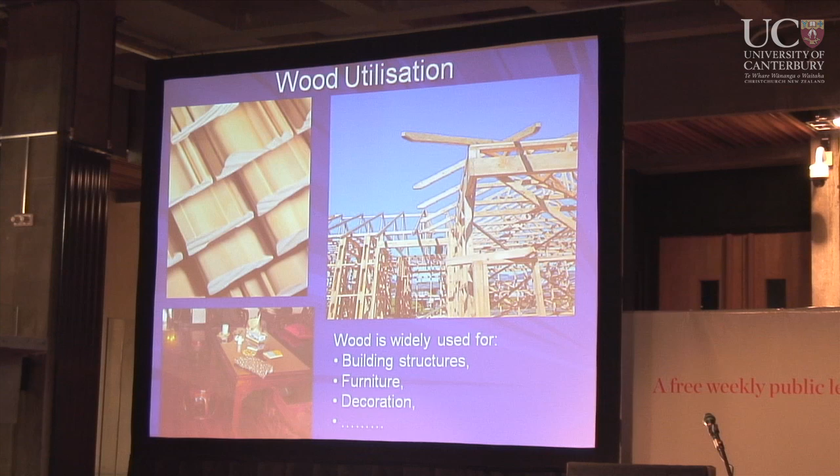So I have been doing research related to wood and also wood-based products for quite a number of years. And today I'm going to cover one of my projects on the wood recycled plastic composite as a building material. Wood has been used widely for structure, for decoration, for furniture, so it's a quite widely used material. So why is wood used so widely? We know a lot of advantages. It's available in many species, sizes, shapes, and has the properties to suit almost every demand.

And wood is easily shaped with tools and fastened with adhesive, nails, screws, bolts, etc. And dry wood also has good insulation properties against heat, sound, and electricity. And the growth ring pattern and colors make it very pleasant for furniture or decoration. And also, wood can be combined with other materials for both functional and decoration uses. And very importantly, wood is a renewable material. The trees absorb CO2 from the atmosphere while they are growing. That is a very good thing.

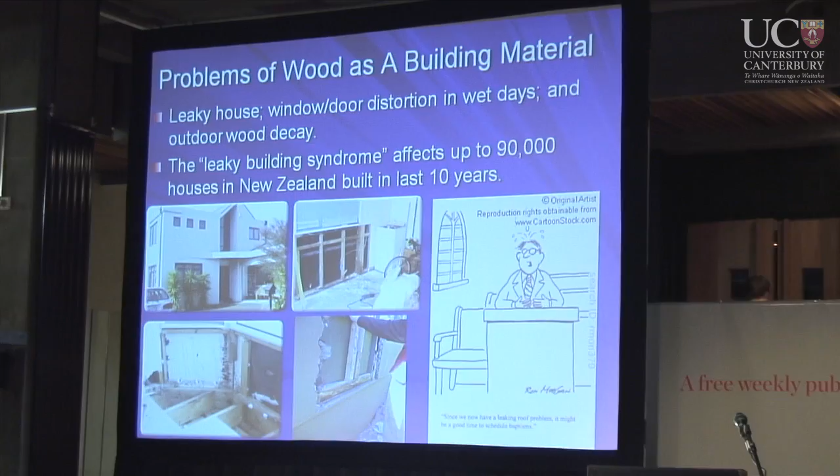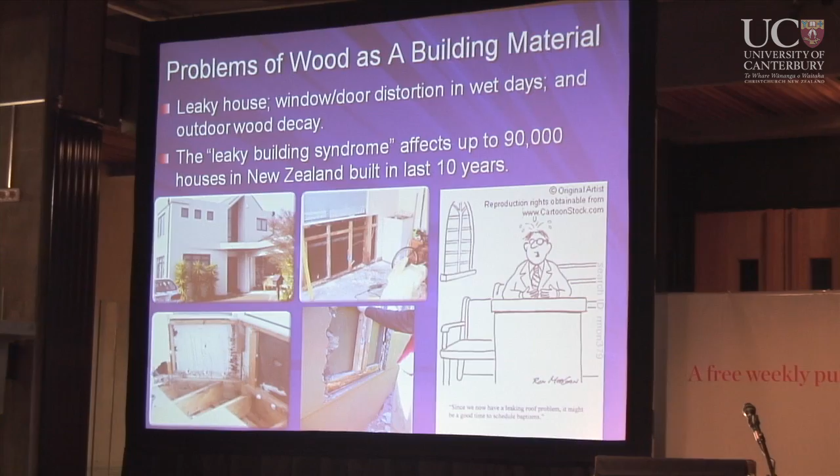However, there are some other not very good things about wood. We have heard of the leaky house. And we know when the day is wet, sometimes you get your window and door jammed and distorted, and also the outdoor wood structure gets decay. So that is a problem. Leaky house and leaky building syndrome affect up to 90,000 houses in New Zealand. If unfortunately you are one of them, you are not alone. In New Zealand, it's about 90,000 houses built in the last 10 years.

So why does this happen? Why does the house get the leaky problem and other problems? There are some natural properties of wood. We know wood swells when it's wet. When you have a wet environment, or you put the wood in water, it swells. When the wood is dry, it shrinks. So if the shrinking and swelling is not uniform, you get a distortion. You can see the wood here.

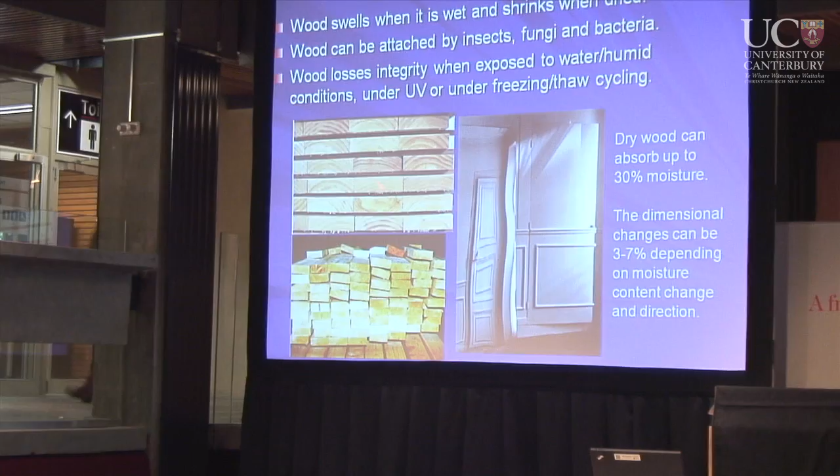You get a distortion. Initially it's very flat. After drying, you get a distortion. And if you have a door like this, you possibly get a lot of frustration. You cannot open it on a wet day, and that is not very good. And dry wood can absorb up to 30% of moisture.

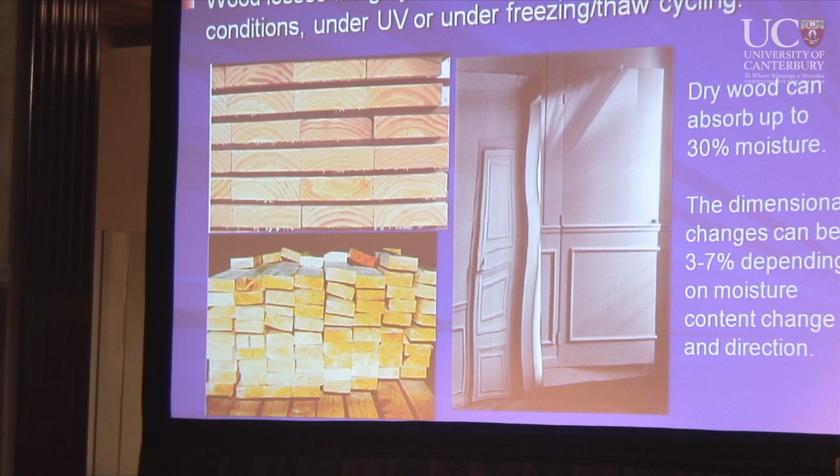Are you surprised? If you put the wood in a very humid environment, every kilogram of dry wood can absorb up to 300 grams of water. And at the same time, it swells, to 3 to 7% depending on the moisture content change and direction. So that causes a lot of problem.

And also the wood can be attacked by insects, by fungi, or by bacteria. The wood loses integrity when exposed to warm water or humid conditions, or UV, or freezing and thaw cycling. So those are the basic causes for the problem with wood.

Okay, solutions. So what's the solution? We need a good design and construction to prevent water penetration into the building. We need to modify the wood, normally using chemicals to make it more stable and durable. So if softwood is used for decking, playgrounds, or marine structures, you have to treat the wood with chemicals. A very common chemical is chromated copper arsenate.

Have you heard the story about this? It's still okay in New Zealand and Australia, but in the US and European countries this has been put under restriction. If you sell chemically treated wood to the US, you will be in a difficult situation. So that's one wood issue - good thing, bad thing.

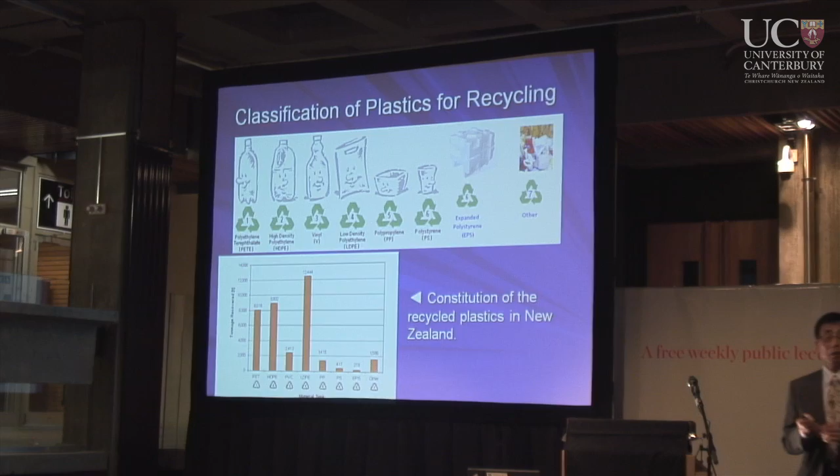And this is the recycled plastic composition. You can see a lot of the plastics we recycle are HDPE, low density polyethylene, high density polyethylene, and PET. So we have a lot of plastic recycled that we have not yet processed - that's a potential to use this plastic for a value-added product.

On this background, we have a research project where we developed a new product using recycled plastic and wood sawdust to make a value-added product for building materials. And if the material is stable and durable and doesn't need any chemical treatment, it's a win-win situation - we can use waste materials and produce a good product for building applications.

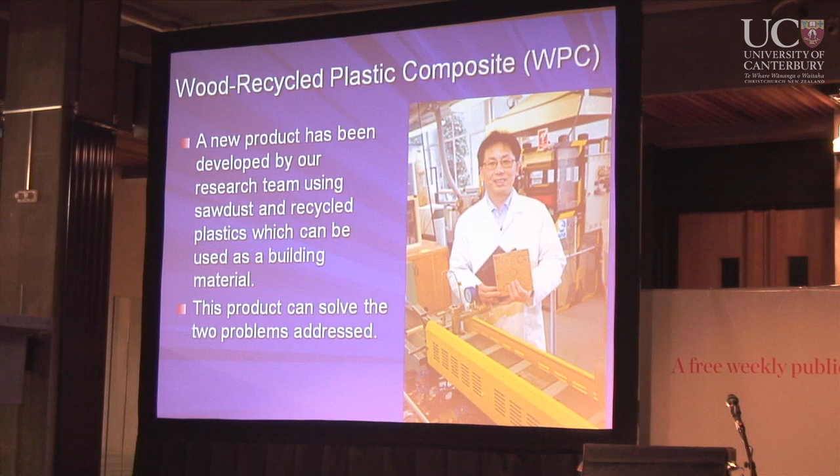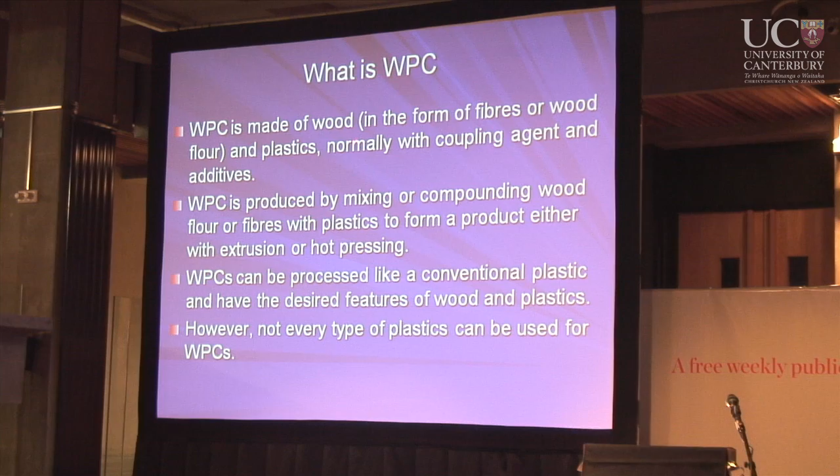Okay, so this product can solve two problems. What is a wood plastic composite? That is the product's name - it's a wood plastic composite, made of wood in the form of fibers or wood flour, and plastics, normally with a coupling agent. We have to add some coupling agent, a very small proportion, to hold the two materials together. Plastic is hydrophobic - it doesn't like water. And wood is hydrophilic - it likes water. They don't like each other, so we have to add something to force the plastic and wood to hold together, and then we can make a good product.

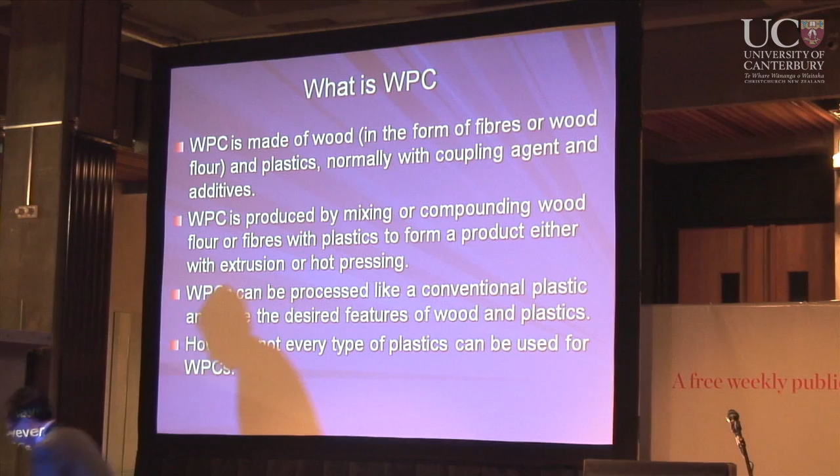The production line is, firstly, we have a mixing step to mix the wood and plastic uniformly together - also called compounding. Then we use a mold, either extrusion or hot press molding, to make a solid product. So these are some products, if you'd like to see, and I've got some samples.

So what I have here, I got some recycled plastic. You've got this food container, and then you've got some sawdust inside. And then we got some product — this is the product we made. So if we use these waste materials and put them together to make a product, you can feel how strong and stable the material is.

Okay, so the product is made of plastic and wood. However, not every type of plastic can be used for this product, so we have to select a certain type of plastic to make it. And we know there are two types of plastic.

One is called thermosetting plastics, also called thermosets. These plastics can cure to a strong form through heating. However, once this plastic is set, the material cannot be re-melted — you only use it once. These thermosetting plastics include phenolics, epoxy, polyester, and silicones. Because this type of product cannot be re-melted, it cannot be used for this composite product.

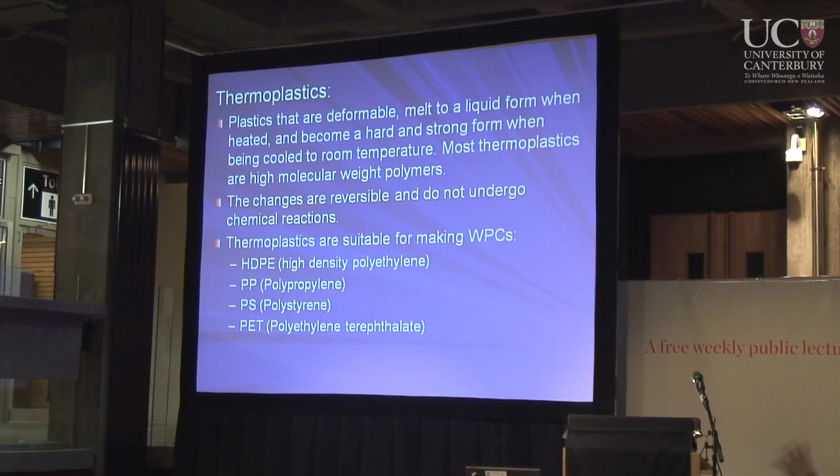Examples of thermoplastics are high-density polyethylene, polypropylene, polystyrene, and PET. This kind of product can be used for wood plastic composite. If you look at the label numbers, most plastic products are thermoplastic, so hopefully we can use some of this recycled plastic for making wood plastic composite.

However, if we want to use this composite for building materials, we need to know the required properties for building. We need the material to be stable — that means when you expose the material to changing humidity conditions, it stays stable and doesn't change too much.

And if you put the material in water, it should not absorb too much water, and it should not change too much in dimension — that is stable and durable. If you use the material for a long time, you don't want it to lose its integrity, strength, or stiffness — that is durability. Appropriate mechanical properties are also needed.

So stiffness, also called Young's modulus or modulus of elasticity, and strength, also called modulus of rupture. Let me give you more explanation about stiffness and strength — these are very typical engineering terms, and if you're not an engineer, you may not be familiar with them.

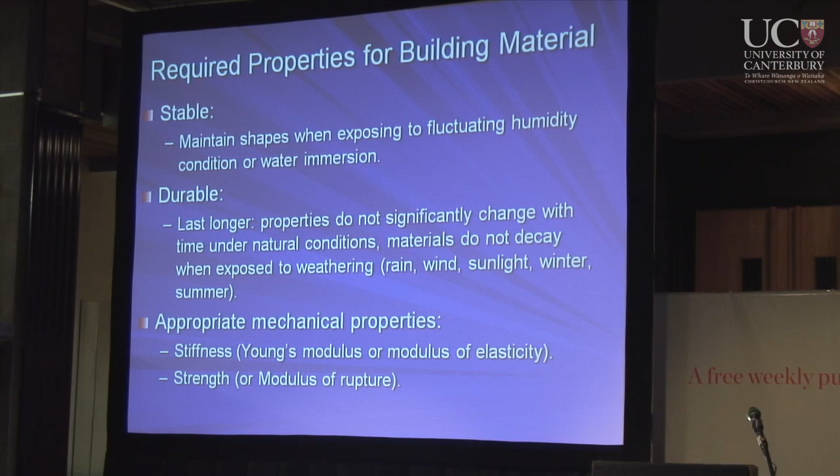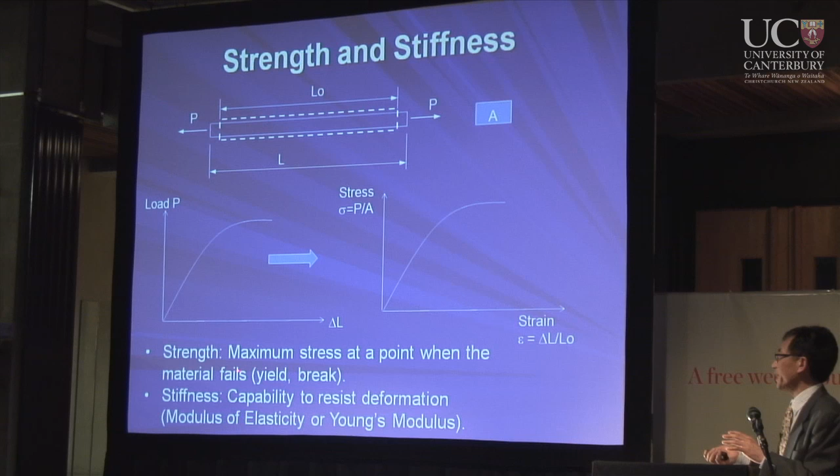And this is the product — let me give you some explanation about the stiffness and strength of materials. So a common explanation of strength is the material's maximum stress at the point when it fails, either by yield or by breakage.

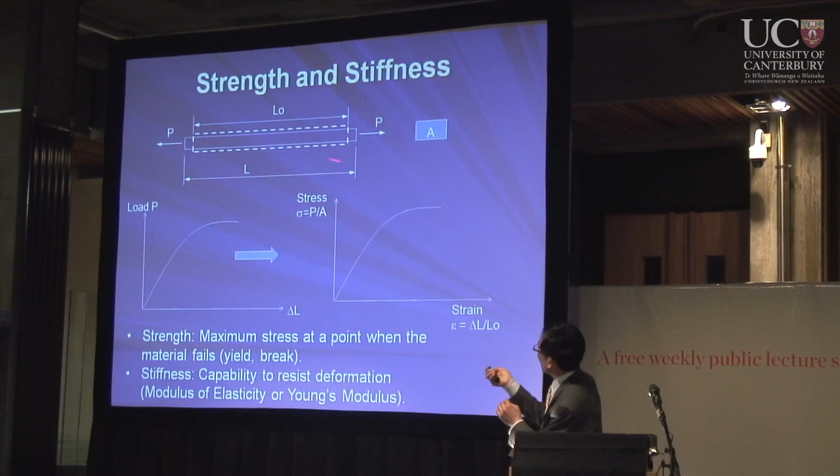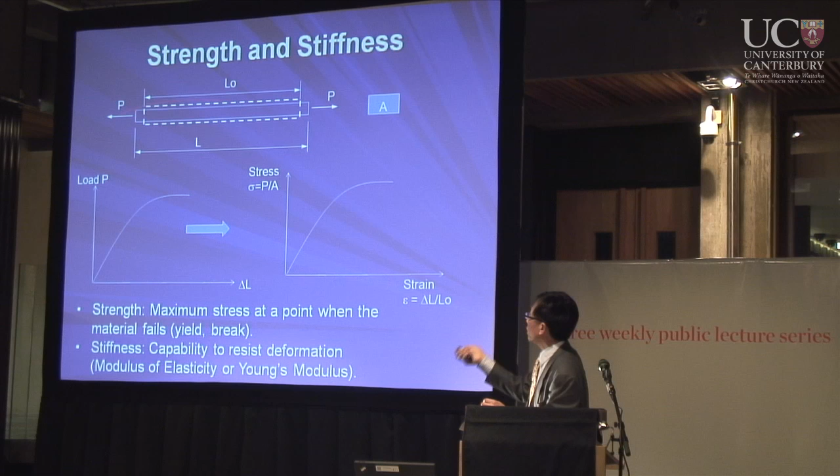So if this is the material under stress, the initial length is L0, and after stretching it becomes L, with the change in length being delta L. If you plot the load against the deformation — the length change — you get this curve. If the material is stiffer, the curve will be steeper, meaning under the same load the material changes less. The higher that slope, the higher the stiffness — the stiffness is the material's capacity to resist deformation.

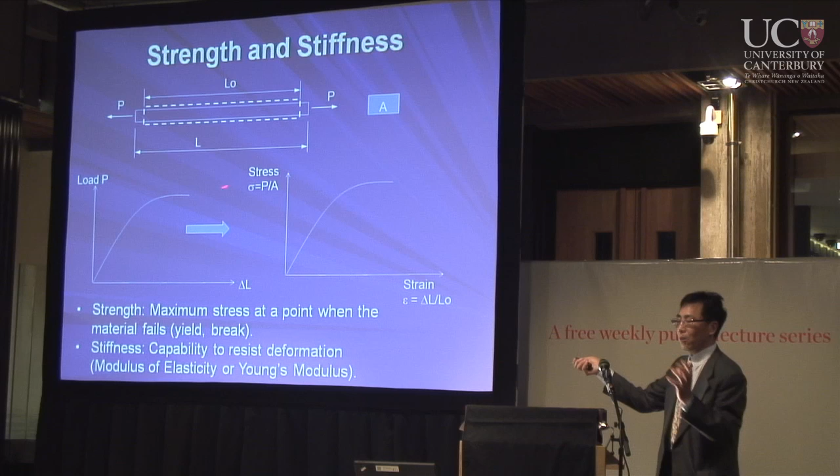If the material is stronger, the load at which it breaks is higher. If you convert the load-deformation curve into more specific terms, it's called stress — the load divided by the cross section — and strain, the length change divided by the original length. If you plot stress against strain, this curve isn't affected by the size or load of the material; it reflects the property of the material itself. If the material is very stiff, this slope is quite steep.

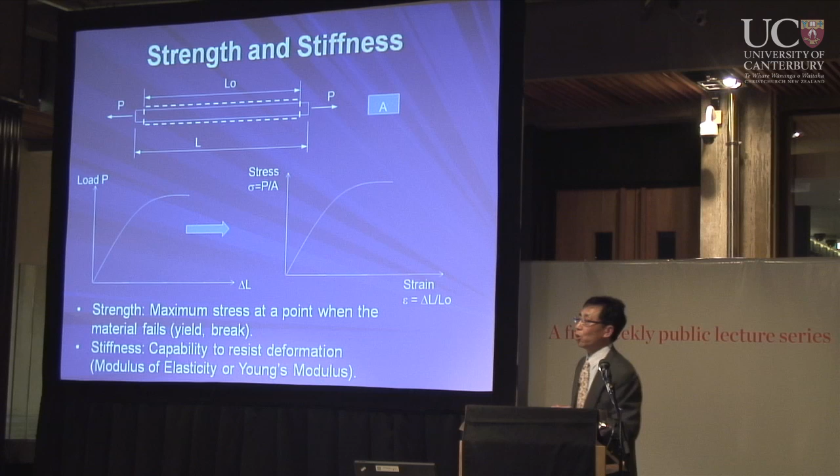This curve is very steep if the material is strong, and the stress is quite high. So when we build a house, we like the material to be stiff, stiffer and stronger. Is that right?

So that is the property we need for building a structure. Okay, so what are the key features for the wood plastic composite? The material is more stable compared to wood. If you put the material in water, it does not absorb much water, and does not change much in terms of dimension.

It's a lower processing temperature, so comparing to steel and concrete, we use a normal 180 to 200 degrees C to process these materials. So it's much lower energy needed for processing. And the lower weight to strength ratio means if you've got this high strength, you don't need too much material compared to steel and concrete.

And it's durable compared to wood: anti-insect attack, UV resistant, and anti-decay, which can be used to substitute chemically treated wood. So that is a good thing. And it can be recycled - the material, when you use it once, you can recycle and reuse again. And it can be easily decomposed, so you don't need to send it to the landfill. You can easily bury it in the soil and it can decompose.

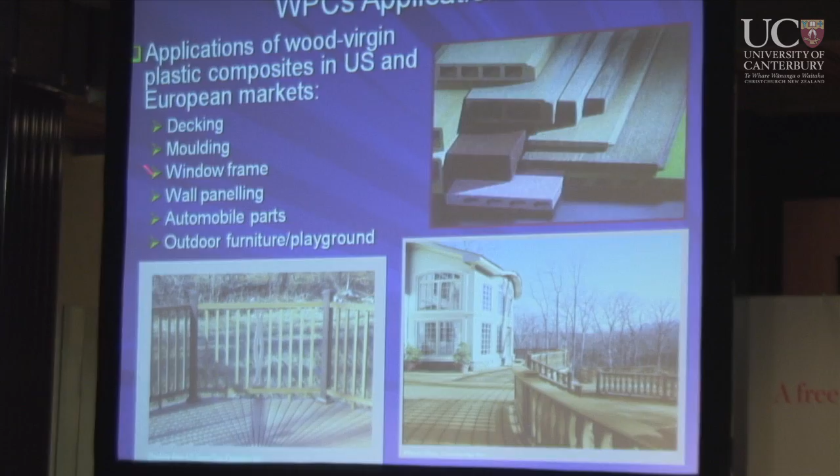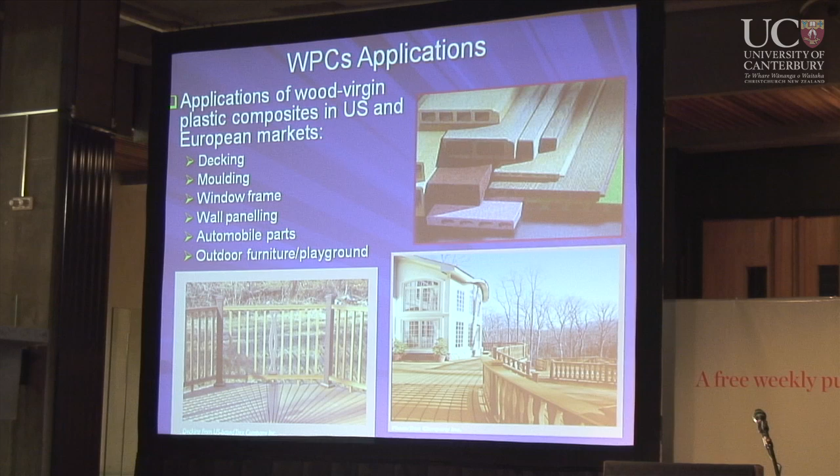So in the US and European countries, the wood virgin plastic composite has been used for decking, for molding in the house, for window frames, for wall paneling, for automobile parts, and also outdoor furniture and playgrounds. So that is already in application for virgin plastic.

Our project uses recycled plastic. So what's the benefit of using recycled plastic? The environmental benefit is obvious - you can reduce landfill and solid waste. And also the cost is lower. The recycled high-density polyethylene plastic is 31 to 34% cheaper than virgin plastic.

How about the properties? Surprisingly, the properties are quite similar between virgin plastic and recycled plastic, even a little bit better. So we still try to study and understand why the recycled plastic has a little bit better strength and a little bit better modulus of elasticity. So you can see it's slightly different, slightly better.

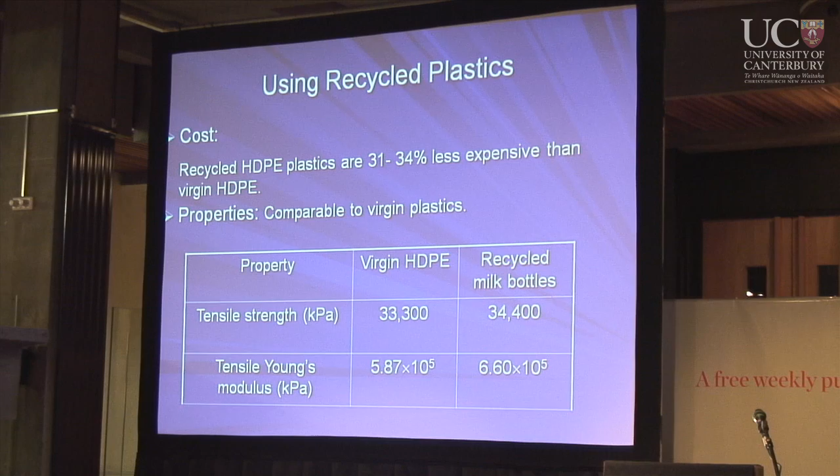The processing in our product normally can be done through either press molding or injection molding. The current wood plastic composite in the market is mainly made through injection molding, and we developed a technology using press molding.

What happens is we first mix the wood particles and the plastic together through a compounding machine. And then we put it in the hot press to form a sheet. As you've already seen, after the hot press the product has been made. Of course, you can make a more complicated shape of product using the hot press.

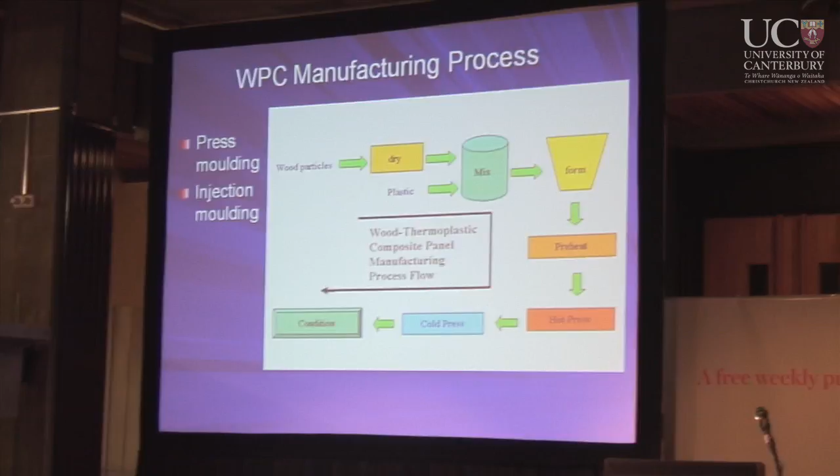What's the benefit of using hot press? The surface property is much better. If you look at the injection molding - two samples from a company that uses injection molding - you can feel the surface, and you can see the surface is quite different. This surface is not as good as the hot press product.

So if you look at the flat sheet, hot pressed product, it's very smooth and also very durable, the surface with hot pressing manufacturing.

Okay, so what's new in our work? As I mentioned, we use recycled plastic. We use hot press molding process. We use optimized processing conditions to make the product which has the most desirable properties.

We test the materials for stability, durability, strength, stiffness, and accelerated weathering conditions. Of course, we cannot leave the materials in natural conditions because otherwise it would take many years - even after my retirement we'd still be testing the material durability. So we have to use a way to accelerate the weathering conditions to test the materials. I will tell you how we did that later on.

We compare the materials we made with materials using virgin plastic. As I mentioned, in the market, virgin plastic composites are already available. So let's see what's the difference if we use recycled plastic to make a similar product.

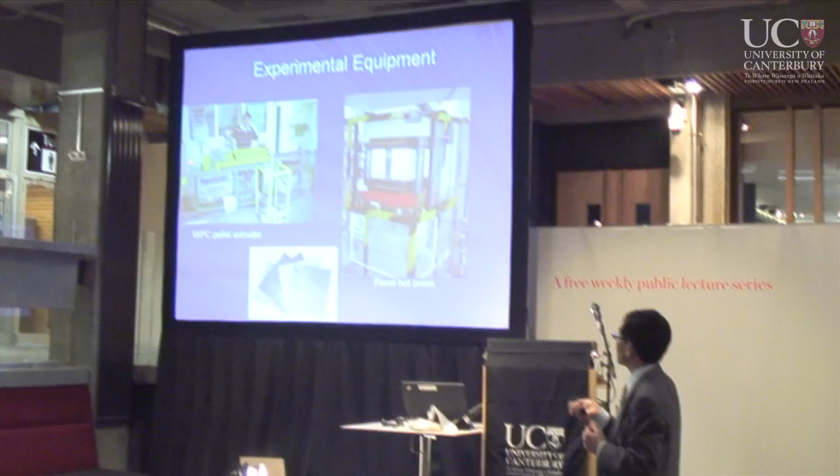This is the equipment we have in the Department of Chemical Engineering. This is the extruder we bought, thanks to the college giving me capital a couple of years ago to buy this machine. This is the hot press, which was in the Simon building before the earthquake, and now that building has been demolished. However, we have another good press in the mechanical engineering department to make the product, and these are the products we made.

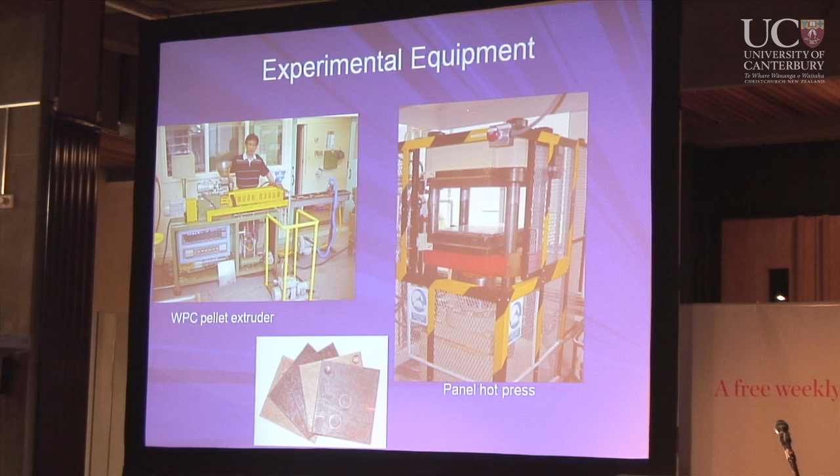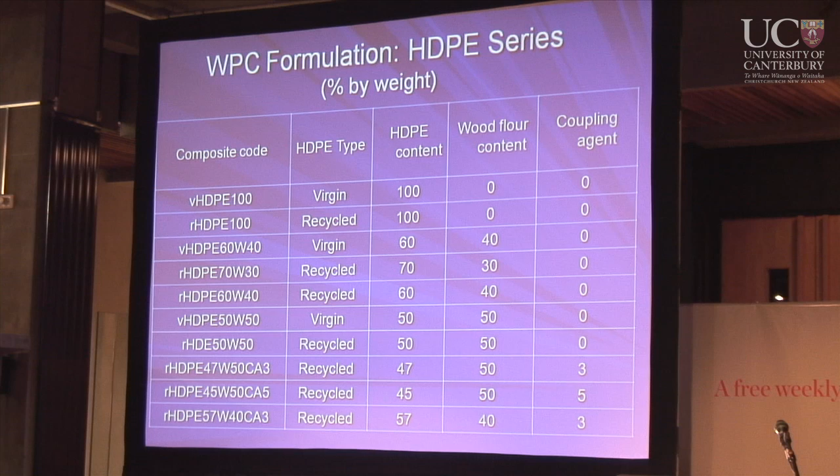So we use different formulations - you can see V here is virgin plastic, R is recycled, with different proportions of wood and plastic, so we can see what the result is. We also did the same for PP, polypropylene.

Okay, so we do the tests. As I mentioned, we need to look at stability. We put the materials in water for 2 hours and 24 hours to see how much water is absorbed and what dimensional changes occur. Then we do tests for mechanical properties - tensile tests and bending tests to get the stiffness and strength of the materials.

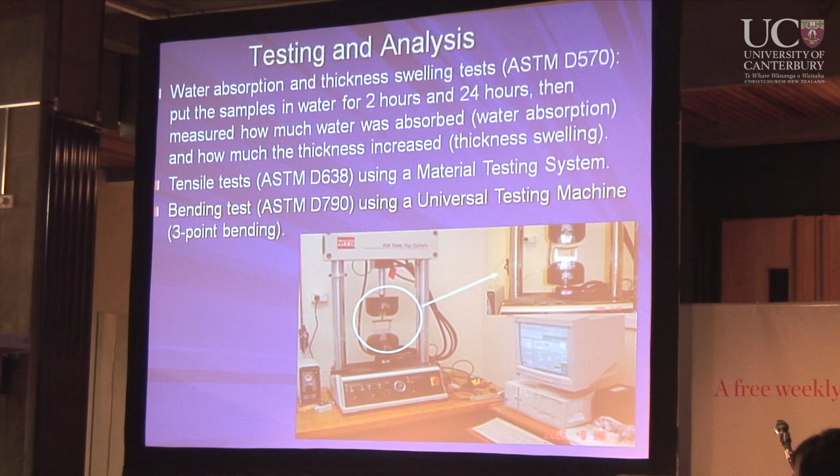We also did accelerated weathering tests using freezing and thaw cycles. We put the materials in the freezer for 12 full cycles. Every cycle, we put them in water for a week, then in the freezer for 24 hours at minus 27 degrees C, then thaw the materials for another 24 hours, and measure the properties after 12 cycles - quite a long cycle time.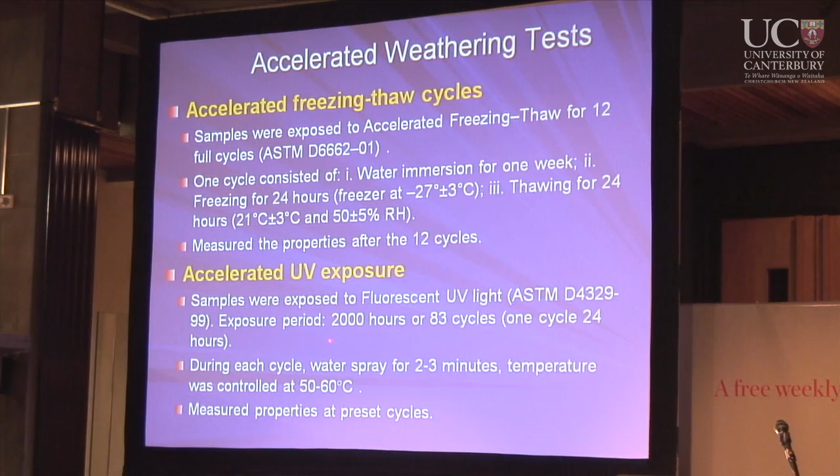We also did accelerated UV exposure tests. We put the materials in a UV box with UV light exposure for 2,000 hours. During these cycles, we spray water and control the temperature at 50 to 60 degrees C. Then we measure the properties at preset cycles to look at the mechanical property changes and stability for both accelerated weathering tests.

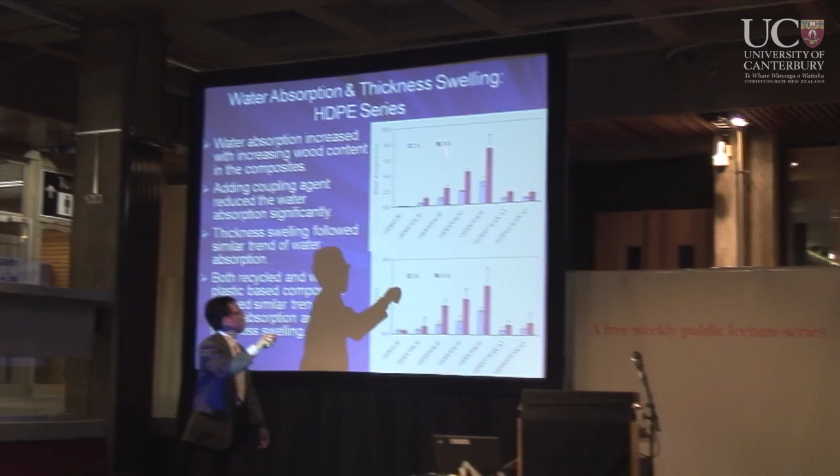And these are the results. This is putting the sample in water - you can see the results here for 2 hours and 24 hours. This is 100% plastic - no surprise, almost nothing, no water is absorbed.

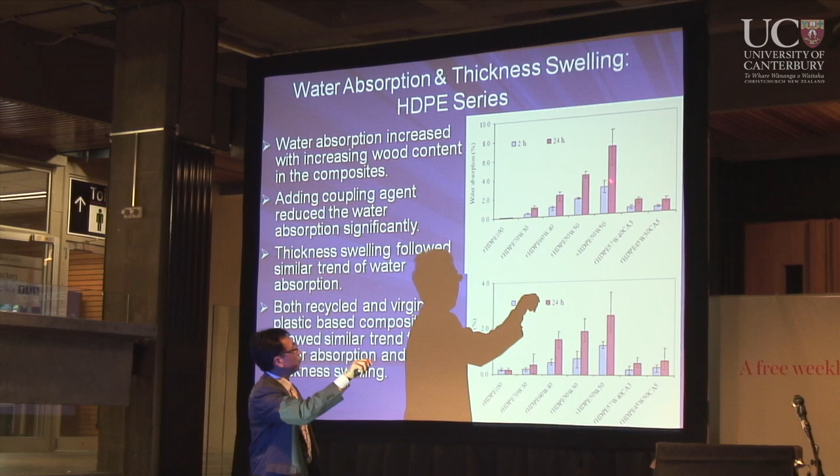This is 70% plastic and 30% wood, and this absorbs some water. This is recycled plastic, 60% plastic and 40% wood. This is 50-50, shown at 2 hours and 24 hours - got a lot of water absorbed by the material after 24 hours.

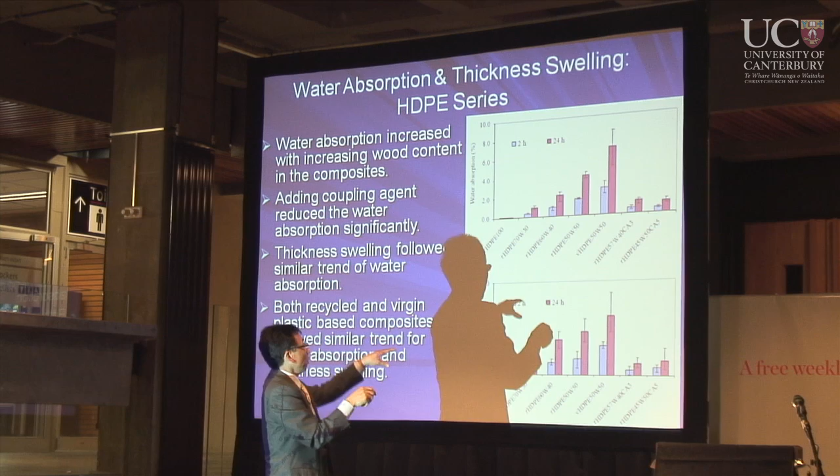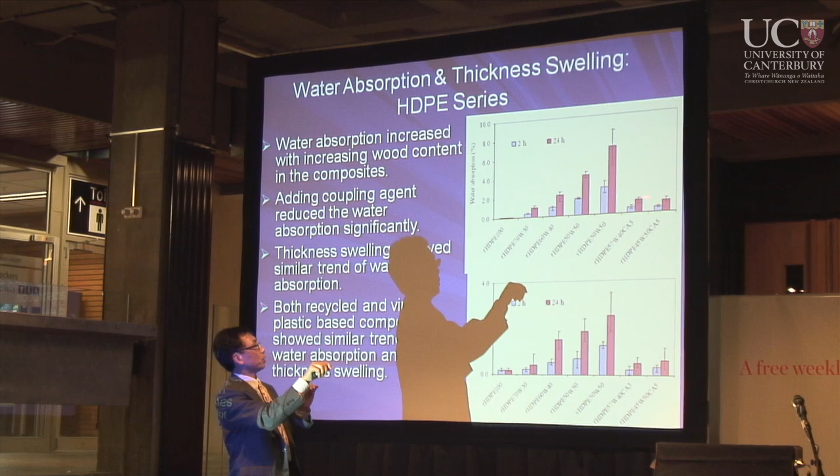However, this is much lower than wood alone. If you put a piece of wood in water for 24 hours, it can absorb quite a lot of water, at least 30% - that's a lot. But when we add a little bit of coupling agent, the water absorption is reduced quite significantly. That's no surprise - when you hold the materials together firmly, it stops water penetration.

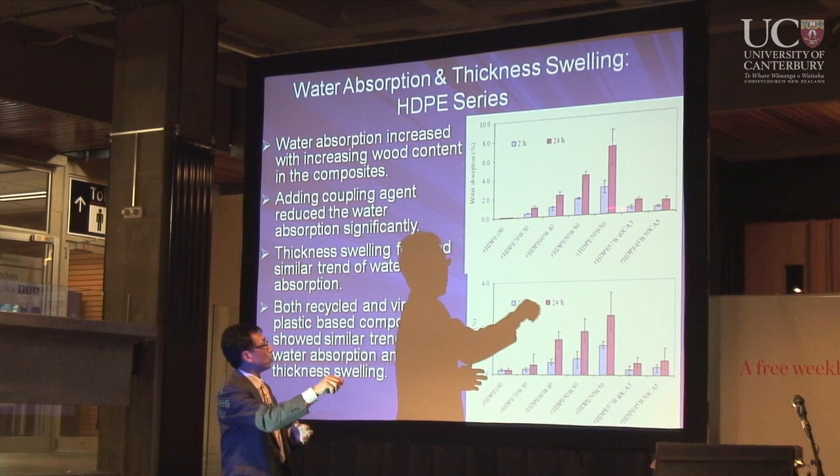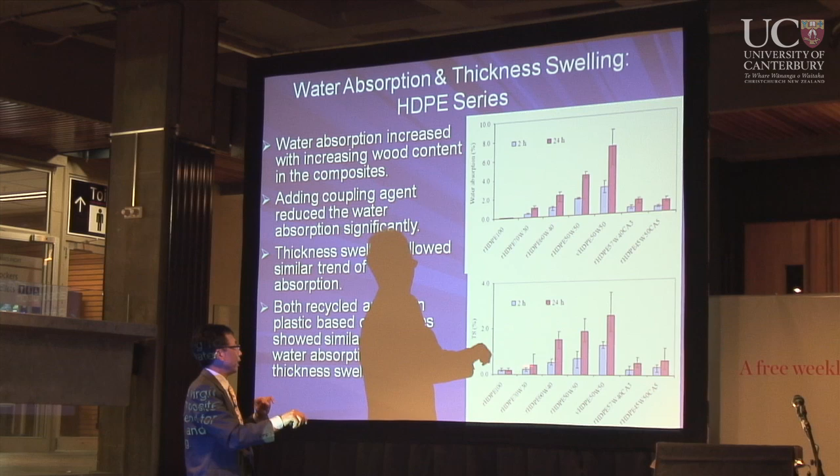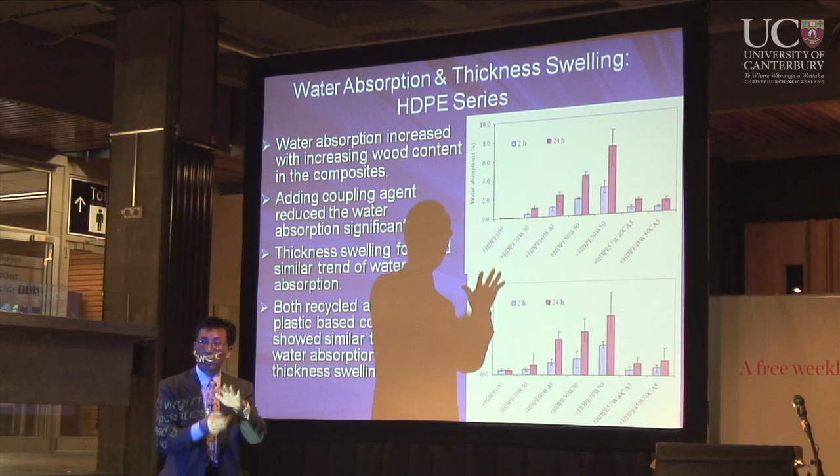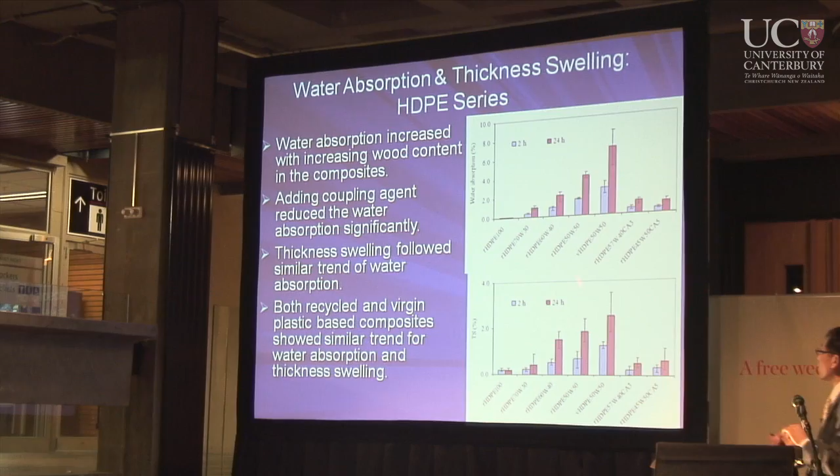So you can see this is a very small water absorption. Correspondingly, if you have less water absorbed, the thickness swell is quite small—you can see almost 0.5%. As I mentioned, if you put real wood in water for 24 hours, you get at least a 3 to 5% increase in the thickness direction. So this is much smaller swelling, much more stable. From this result, we can see the material is quite stable—it absorbs much less water, and the thickness swelling, the dimensional changes, is much smaller than wood.

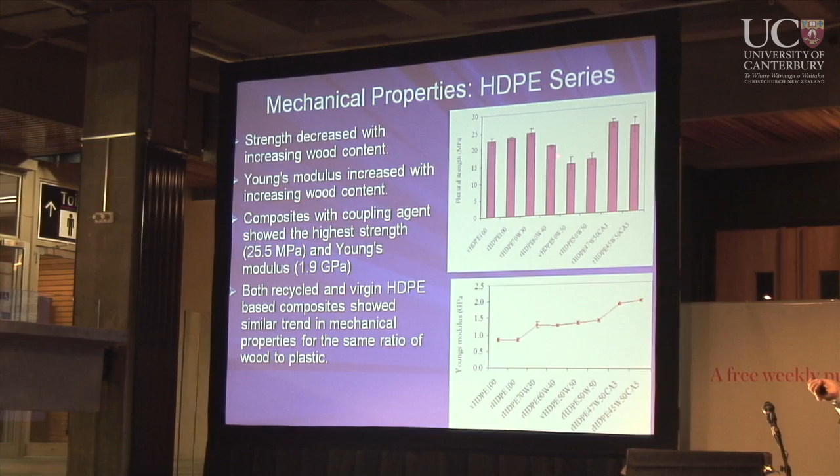And then we look at the mechanical properties. This is the strength. If you got a pure plastic, it's a little bit higher. However, when you add wood, the strength is decreased a little bit. But if you add a little bit of coupling agent, the strength is increased quite significantly.

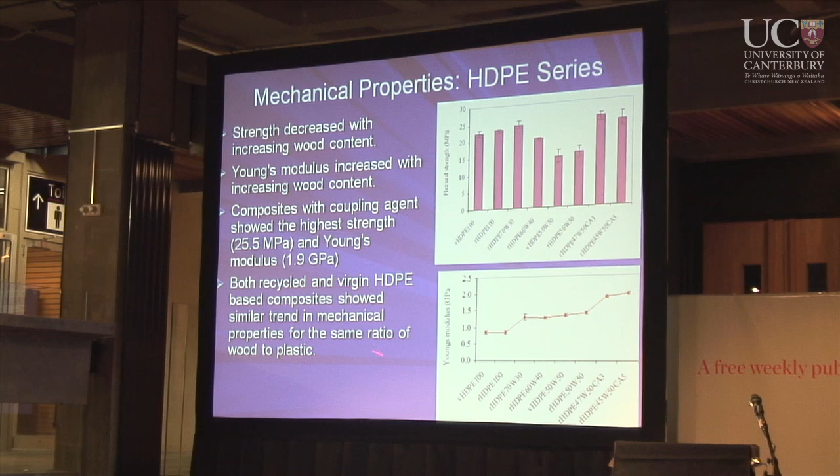That's the megapascal of this strength, almost 25. And this is the stiffness. As I mentioned, we like the material to be stiffer. The stiffness for pure plastic is much lower—no surprise, if you try to bend pure plastic it's relatively easier. If you add wood, the material is getting stiffer and stiffer. If you add a little bit of coupling agent, it's very stiff—the stiffness is very high for these materials.

So if you look at the result, these are the formulations we want to develop—that gives you the best result for stability.

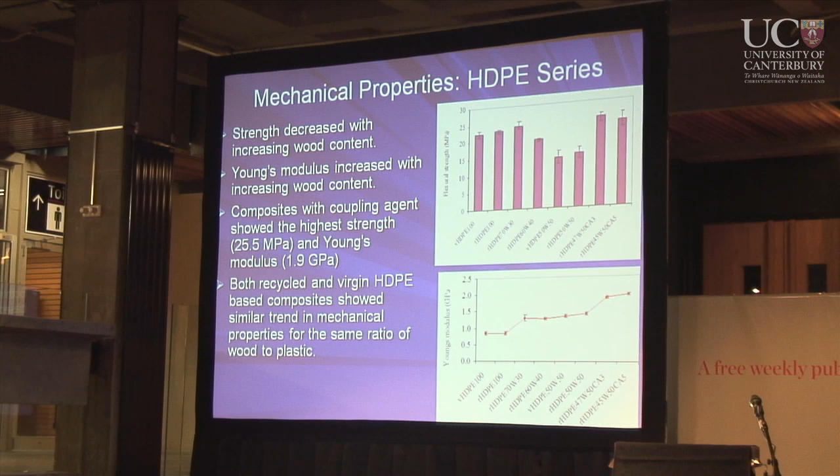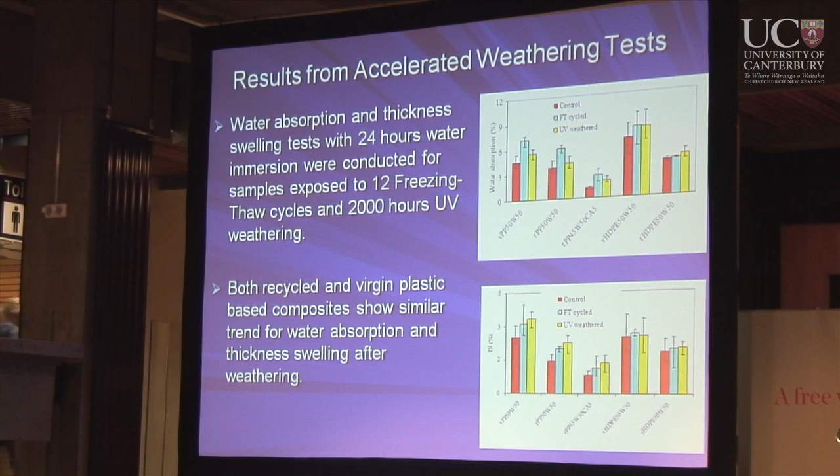So that is the result. And then we see, what's this? And you can see what's the market.

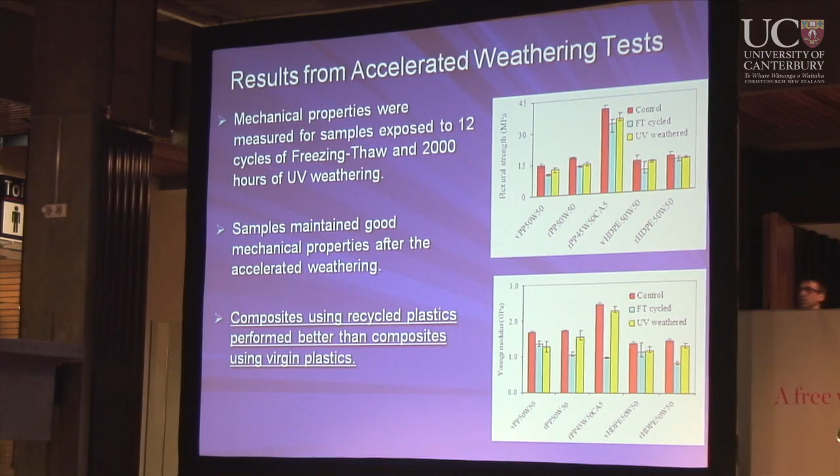Okay, the product is good, but I didn't tell you something not really good—it's the color. If you use recycled plastic, the color is not as clear or as white as this one, so you get a dark color. However, a painting company recently contacted me. They want me to do a project to see about painting and the properties—if we have a very dark color, whether we can put some paint on the surface and still get a good color. We are still going on, continuing research on this product to make it paintable.

Okay, so that is the result coming from our research. If you want to build a plant, you may be concerned about the dollars—how much we can sell if we make this product for decking, for example. At the moment, New Zealand consumes about 30,000 cubic meters of wood for decking. Are you surprised? However, two-thirds of that material is imported. Unfortunately, we sell a lot of wood, but also we buy a lot of wood, hardwood, for decking.

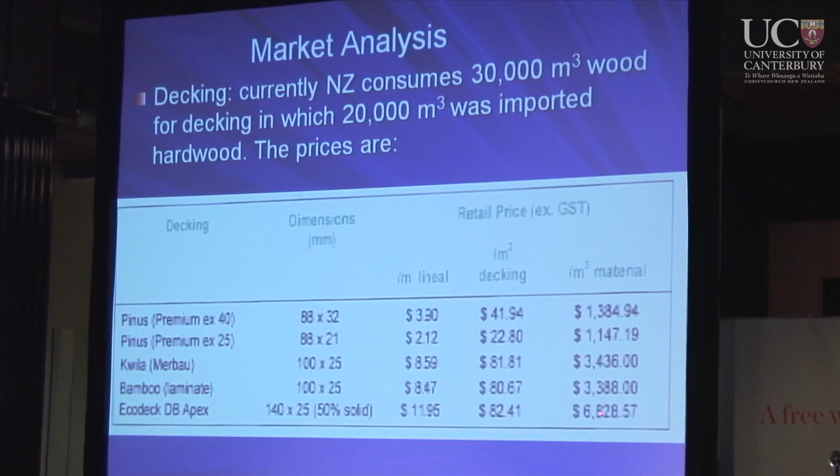And the price: if we use pine, the price per cubic meter is about 1,300. If we use imported wood, 3,500. If we use the Ecodeck, which is similar to the current market price for wood virgin plastic composite for decking, it's $6,800 a cubic meter. So that's quite a lot. And if we try to occupy only 10% of the market, that is 2,000 cubic meters.

If you want to build a plant to produce 2,000 cubic meters a year, using the median price, how much money can you still make? 7 million, is that right? Almost 7 million.

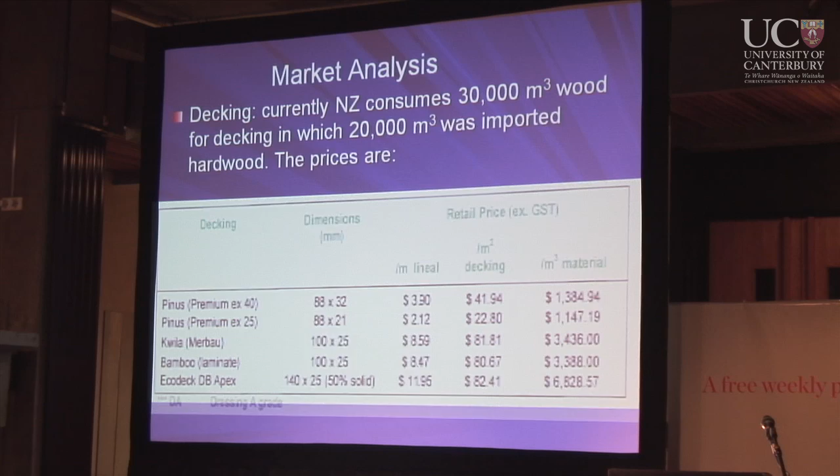And then you get another price if you use the materials for molding. The price for molding is a little bit higher. If you use pine, finger-jointed, primed and painted, that is 5,000 per cubic meter. If you use clear pine, it's 6,000 per cubic meter. If you use MDF, it's 3,000 a cubic meter.

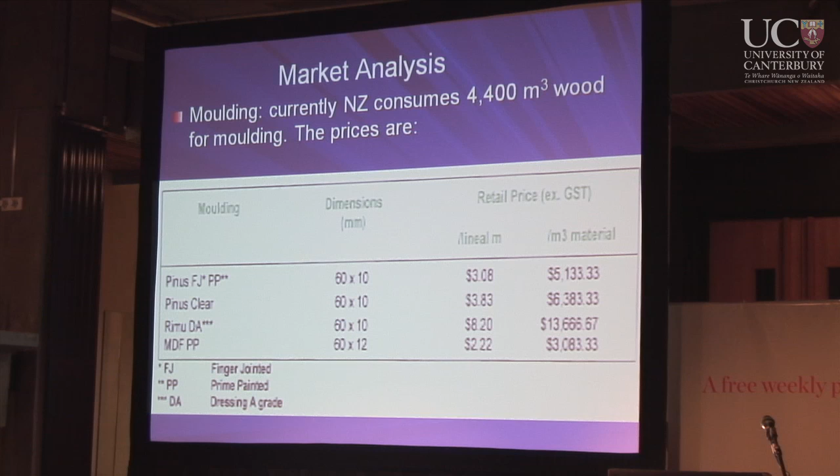And the cost: if you want to build a plant, not 2,000 but 1,000 cubic meters of this product per year, with a density of about 1,200, the total equipment and installation cost is about 1.5 to 2 million. We and a contractor went to China, the US, and European countries to look at different machines and equipment, and adding them together, it's about 1.5 to 2 million for all of the equipment and installation.

And the total storage and building cost is about 32,000 per year. And the operational cost, including labor, materials and energy, is $1 per kilogram of product. So that is the cost. If you build a plant at this capacity, every year the revenue is about 3.5 million. We use a medium price.

Okay, so of course, if you want to look at different scenarios and more detailed data, we are still continuing this research on price analysis to see the return, the benefit, and the investment.

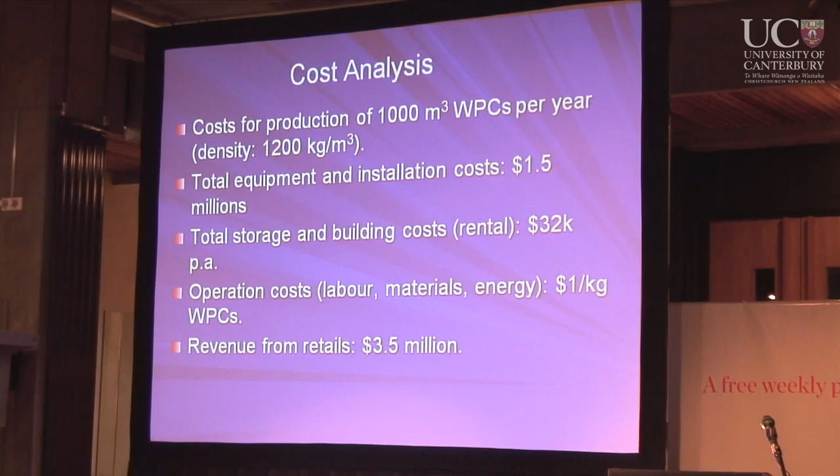Okay, so from this work, we conclude that recycled HDPE, high-density polyethylene, and PP, polypropylene, can be successfully used to produce stable and durable wood plastic composite. That is based on the results we have got. Adding a small proportion of coupling agent can significantly improve stability and durability.

And the quality: except for the color, which we didn't show you, the color is not as good as virgin plastic. However, the other properties of the wood plastic composite using recycled plastic were similar to or better than those of wood virgin plastic composite. And the two types of plastic, HDPE and PP, showed a similar trend for stability and durability. These two types of plastic are quite similar.

And HDPE, do you know what product we are using for the HDPE? Milk bottles. Okay, so milk bottles are made of HDPE. If you want to make this product, you just collect your milk bottles in the garage. And PP is the food container, like the ice cream container. So they have quite similar properties when we make this product.